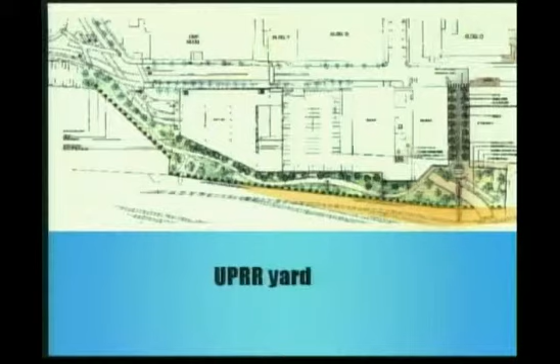When I talk about the yard, it's that orange section which is adjacent to the proposed greenway, the Horton Street Landing Park. So it's that strip which is adjacent to the proposed park. As well as there might be a need for an easement for the bridge itself.

There's been significant progress on the greenway. Portions, the section north of 59th Street, have all been developed except for the portion adjacent to the Glass House. At the time we were developing the bridge, Chiron, then Chiron, now Novartis, was preparing their designs for the park, which is called Horton Landing, and it may be appropriate to revise those plans given the ramp designs.

In October, the CIP had an appropriation for the project at $8.47 million, and staff has been applying for grants for the project from various sources. The $8.47 million considers the long bridge design, which is what you have in front of you, a two-span design. There have also been other developments, which I will bring up in the course of the rest of my presentation.

Now, there has been consensus in these discussions. Basically, there is a desire to proceed with the design in front of you, the two-span project. Can I just interrupt? You're saying there's consensus on that? Well, at that time... Okay, sorry. At that time, we were sort of... I'm going to get back to where we might need additional discussions. So at that time, there was a favor for this design, and there was a preference for the extended ramps at 5% grade and 10 feet wide.

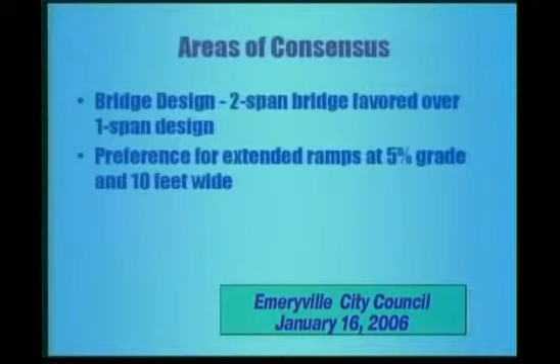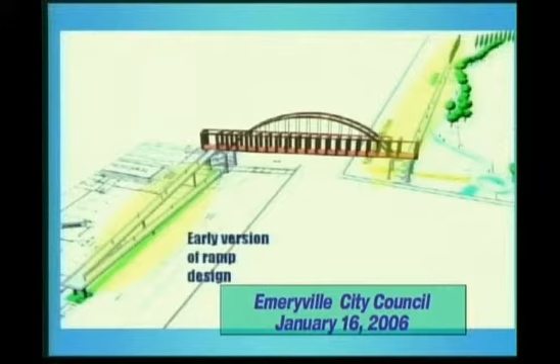And this is one of the early renditions of the long version of the ramp. Single span. Well, yes.

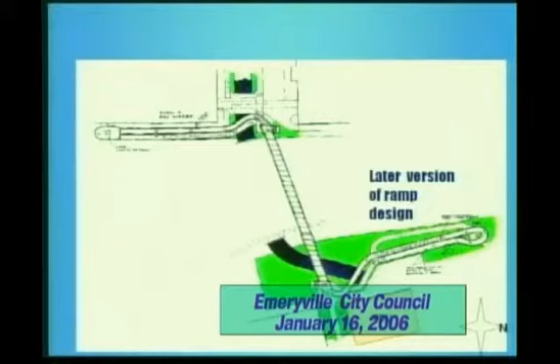And this is a rendition of the long span bridge. This is a later version that was presented to council, and I think this is the last drawing presented at the June 2005 meeting.

Ignacio, just so if there's people looking, the difference now is that, and this was a lot of John's doing before he was on the council, was to suggest these ramps. So the big change we're seeing here is ramps on both sides, correct, rather than just this stairway elevator thing.

Right. The early design - I will come up and discuss further the ramps, the elevator, and stairs in succeeding slides.

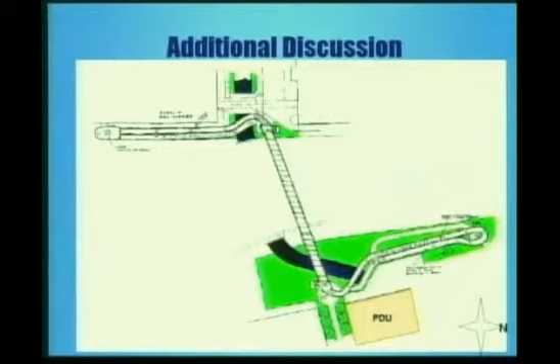Okay, now there are other considerations that have to be made that were not issues in 2005, and Hank can elaborate more on this. One issue is ADA, as it relates to stairs, elevators, and ramps.

Our understanding is that there will be new guidelines on ADA, and it might affect the way we have our ramps designed as they are now. So it might be appropriate to discuss whether the ramps be shortened and an elevator added, or other ways to equalize access among bicyclists, pedestrians, and those with disabilities.

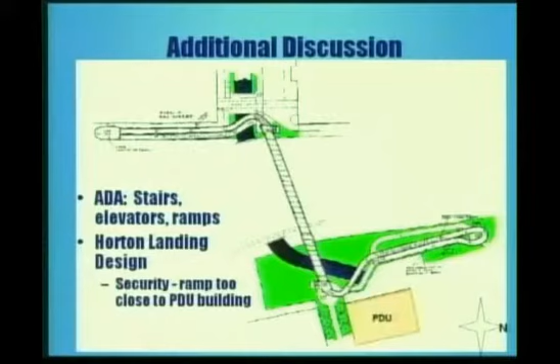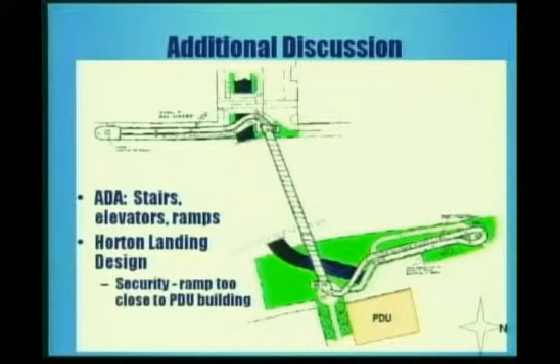And how the current ramps affect Horton Street, the Horton Landing design. Novartis, for one, is concerned about the current design of the ramps being close to the PDU building. The PDU building is a manufacturing building which has FDA approval, and they have concerns about the security of this building with the ramps being close to it.

There are also concerns that the ramp design itself takes a substantial portion of the width of the park in that section where the ramp exists.

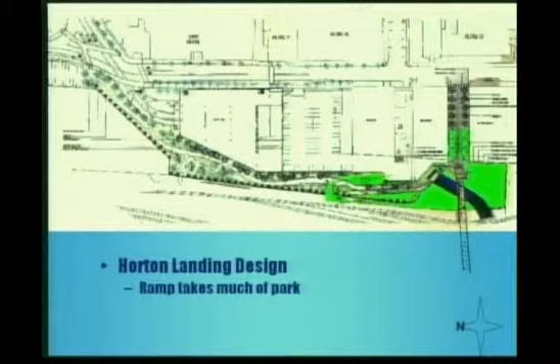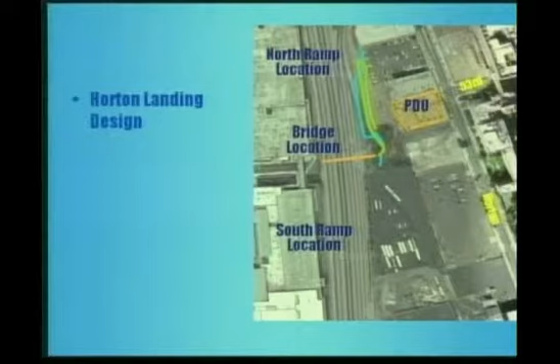And Novartis has proposed an alternative, and I just bring this up for discussion. What you have in front of you: the green is the schematic for what the ramps are proposed as, and the blue line is where the pedestrian path would be.

There are concerns with this suggestion, being that with a shorter ramp length it would probably exceed the 5%, and there would not be a good connection to the 53rd Street pedestrian access, which was the goal of the earlier designs.

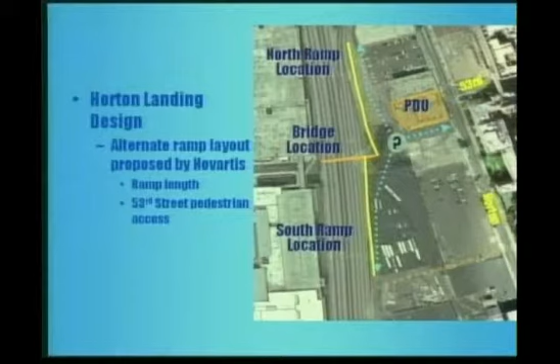So given all those design considerations, staff is recommending that the agency retain consultants to complete the preliminary design, taking the ramps, the Horton Landing Park, code issues, and security into consideration. This will involve a civil engineering firm, an architectural firm, and a pedestrian bike consultant that can provide a third party and neutral body to evaluate all the considerations as they relate to bike, pedestrian, and ADA issues.

As we develop those designs, we will go before the bike ped subcommittee, the planning commission, and before the agency and council. We will also begin negotiations with Sherwin-Williams on the spur leading into their property, as well as with UPRR for the easements and right-of-way. And that concludes my presentation.

Ignacio, do you have any kind of tentative timeline for how we're going to proceed on this? Well, we could begin selecting consultants almost immediately. We have them well identified. I think all of us on the council are interested in seeing this project move forward in a timely fashion.

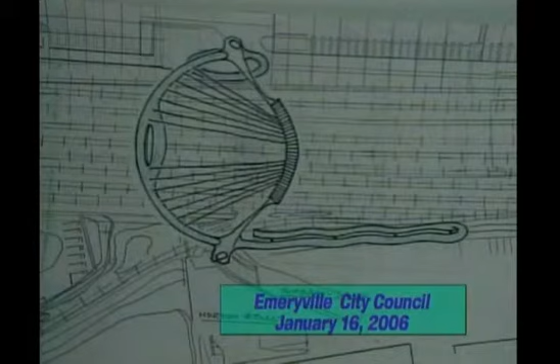And we're crossing the railroad tracks, which are about 200 feet long. What I came up with initially is this design, which in plan resembles a seashell, which I thought was quite appropriate since the human beings that resided here way before we did thrived on a seashell culture and on marine life. So this is a bridge that is much more than a bridge. It's an experience. It's a chance for pedestrians to experience something completely different and exciting, hopefully.

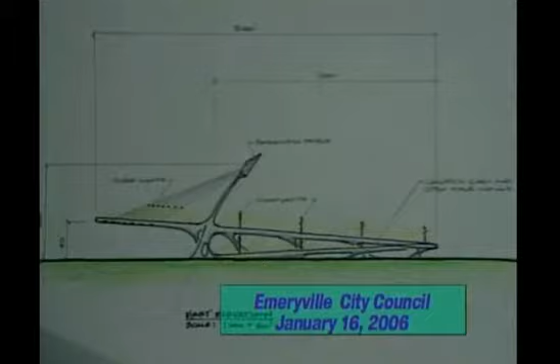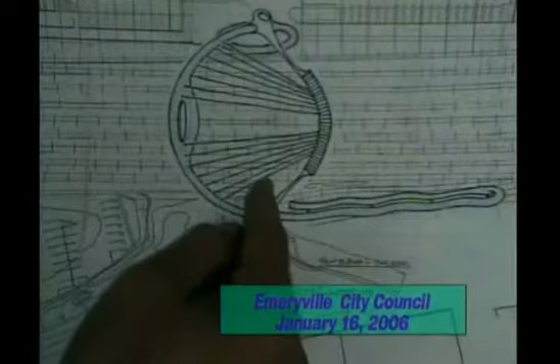The elevation of this is this. It's 100 feet high from the ground to the ceiling, or to the top of the parabolic arch. The arch is pulled backwards at 30 degrees to create more ability, more efficiency to hold up this front end, which is a semicircular front, as you remember from the plan over there. So this arch is pulled back 30 degrees and is pulling counter to the semicircular ramp.

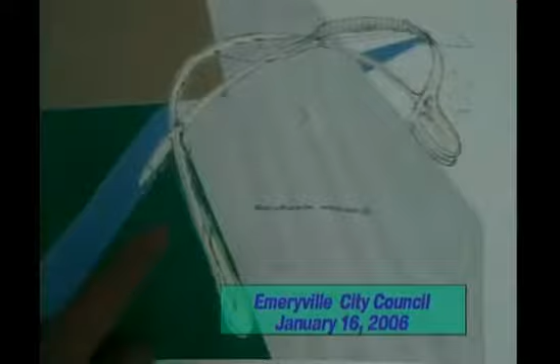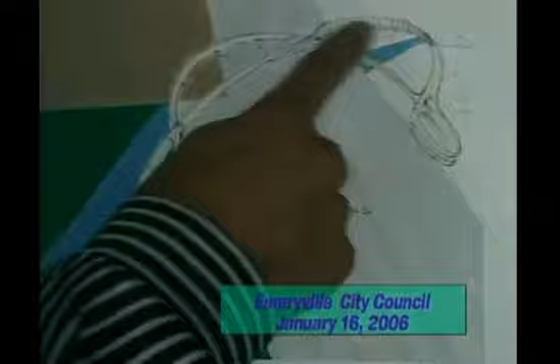In another sketch, you see the parabolic arch or catenary arch, and then the ramp that hangs from the arch. On top is a series of photovoltaic solar cells. And what these cells do is they create renewable energy, electricity, to all of the lights in the entire area, not just the bridge, but also the pedestrian walkways and bicycle paths leading from one neighborhood to the next neighborhood.

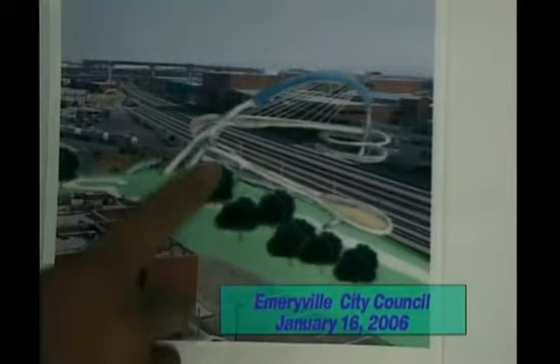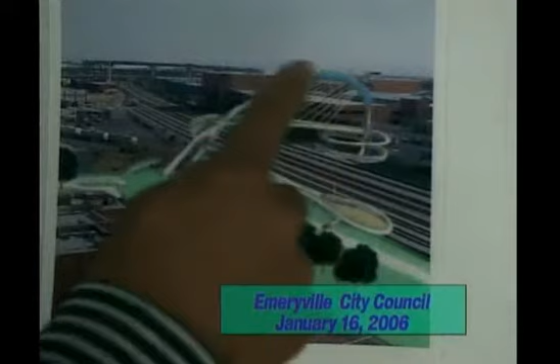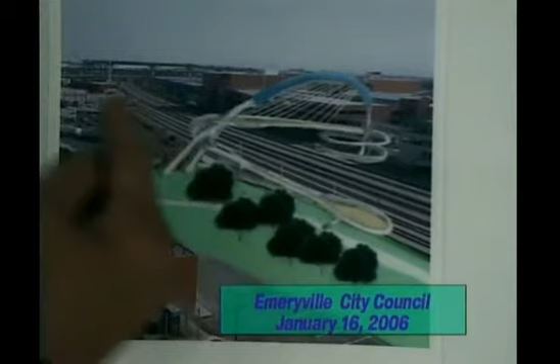What you see might be something like this, which is a series of ramps, uninterrupted, continuing up to a semicircular arch, and then spiraling down to the other side with this parabolic form and the shiny photovoltaic solar cells on top. Something that thrusts the city of Emeryville symbolically into the future, because what you have is a wing-like, shell-like bridge that is a launching pad for the future, you might say, symbolically.

And if we were to put the history of Emeryville from the first recorded human beings to the present time, and then left some space for the future, we could perhaps in mosaic form or ceramic tile form create a living history for Emeryville on that bridge, so that everyone who comes there would then be able to decipher a brief history in time.

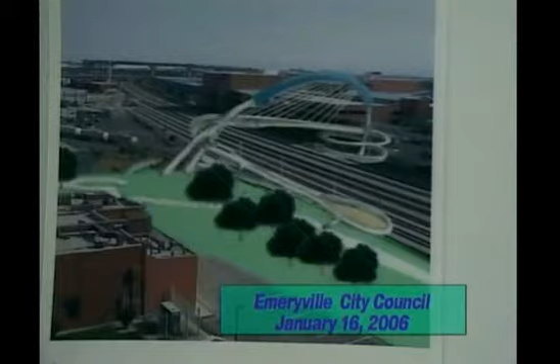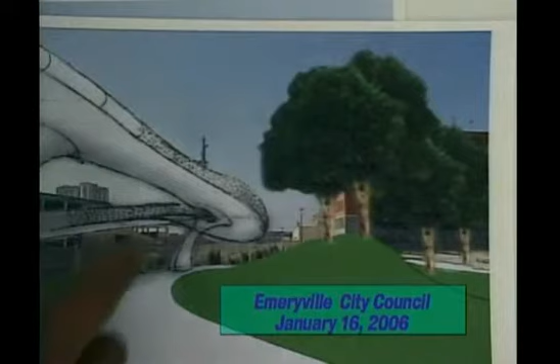Also, here's a little sketch I did of what you might see entering that ramp or coming close to it. What you have is a series of curved pylons that have these copper totems, lighted totems on top that light up the area from above, and then these open hole continuous rails that have 4-inch holes by code, so that people can see through them and perhaps even have recycled bottle bottoms, different colors, inserted inside them.

And so what you get is a living work of art, an experience from your first visual introduction to it. You walk up through it, around it, and down to the other side, and you get the entire history of Emeryville in one walking.

You also get an experience of the future. There's nothing like this bridge that I know of today. It uses a special kind of angled, 30-degree angled parabolic arch system. I work with some of the best, most accomplished engineers in the world, and they're absolutely satisfied that this will work.

In fact, we actually did a cost estimate, and it would come well within the $7.5 to $8.5 million to create it. Really? Really.

So you have renewable energy, you have the history of Emeryville, you have a work of art, you have a vision of the future, and you have something that's unlike anything else in the world. It seems to me that would make the city of Emeryville proud, and would be a message from us to the world that we are looking to the future in a very imaginative way.